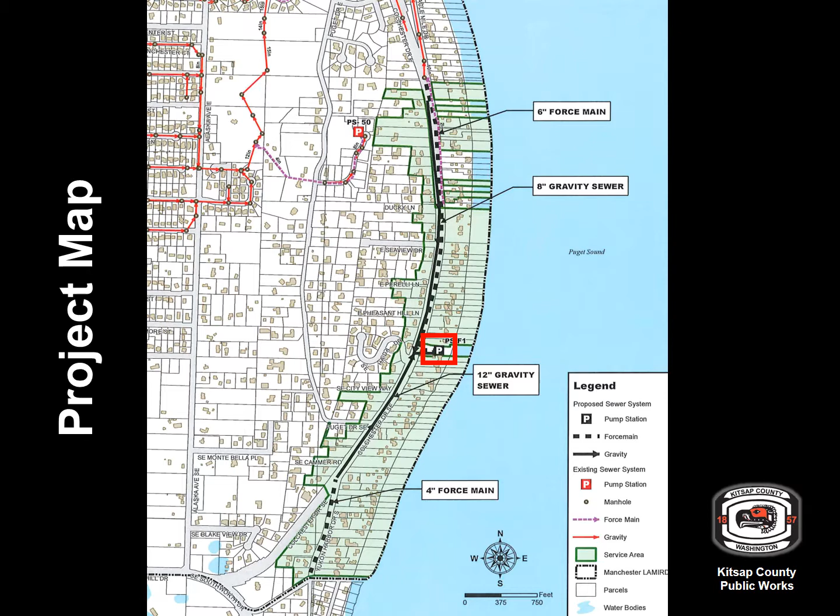Project components include a pressurized force main, gravity pipe, and a pump station placed on county property, outlined in red. Side sewers to connect to homes, and individual grinder pumps for homes on the shoreline that require sewage pumped up into the system. Construction on this project is slated to begin in spring of 2017.

There are key points for property owners to consider when deciding if they want to connect to sewer services once the project is completed. The county has been awarded funding by the Department of Ecology in the form of a loan of $432,000 that can be used for design and permitting for the project. The loan is funded at 2.4% interest and repaid over 20 years, and a $4.56 million centennial grant that can only be used for construction costs.

A utility local improvement district, or ULID as they are known, is a financial tool available for property owners within the proposed project limits. The ULID allows property owners to spread their costs over a 20-year period. Property owners that participate in the ULID also have access to any excess grant funds, which then can be used to offset individual property costs.

Property owners need to decide if they're going to connect to sewer service once it becomes available. If you do not connect, you will not incur any costs. In the rest of this presentation, we'll explain the costs associated with connecting to the sewer system and also the options of self-financing these costs or connecting via the ULID.

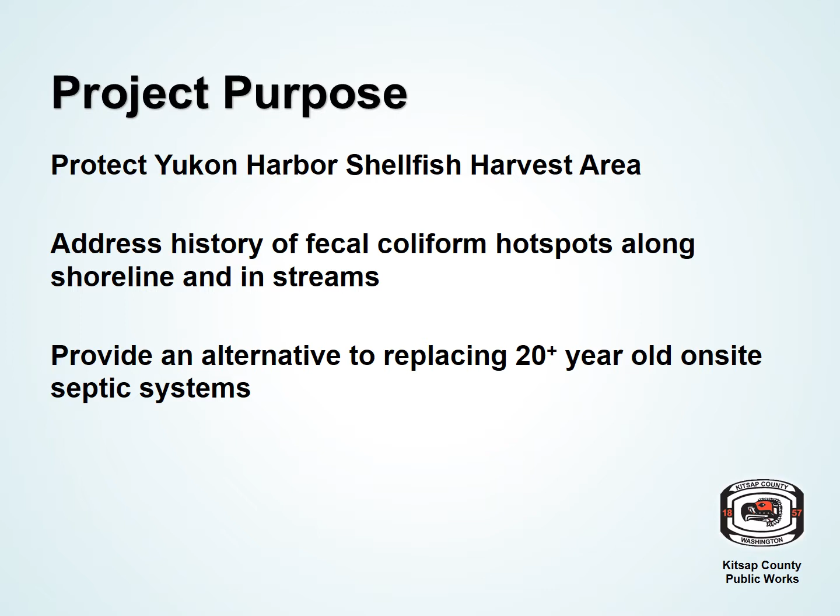The purpose of this project is to help protect the Yukon Harbor Shellfish area. This project addresses a history of fecal coliform hotspots along the shoreline and in streams by providing an alternative to replacing on-site septic systems, some of which are 20 years or older. The county received grant funding from the Department of Ecology to improve these environmental issues.

The total property owner cost to connect to sewer includes three elements: common infrastructure costs, individual property costs, and a newcomer's fee. The common infrastructure costs consist of the pump station and sewer pipes in the street. The cost for property owners, which includes a portion of the design and permit costs, is $8,500 per parcel if the property owner decides to connect.

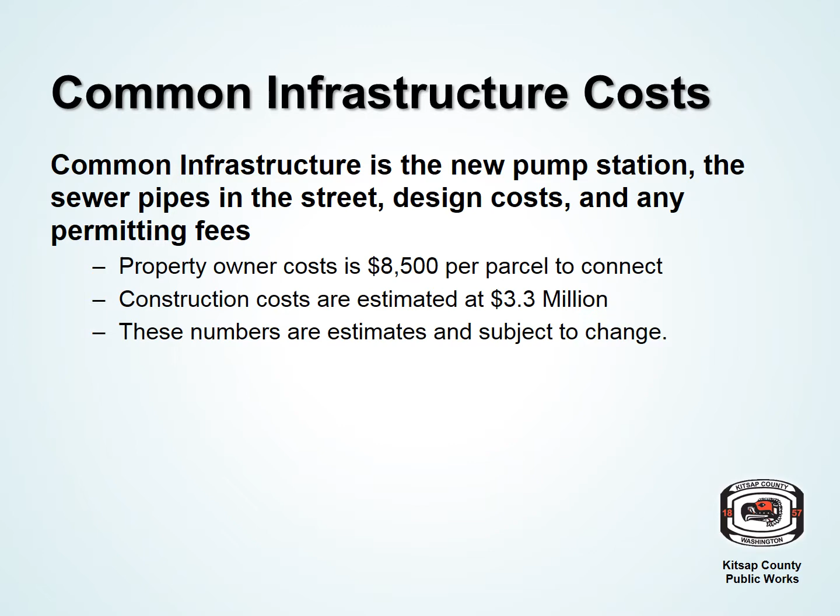Current estimated costs of construction are $3.3 million. Grant funding from the Department of Ecology for $4.56 million may be used for construction only. If grant funds remain once construction is completed, those funds can be used to offset costs to property owners. These numbers are estimates and may increase or decrease.

The other costs to property owners include the individual property connection costs and a newcomer fee. The individual property connection costs are the costs of construction on your property. This is different than the cost to build the common infrastructure. These are the costs that connect your home to the common infrastructure.

Of the 121 lots within the project area, 79 are below the sewer and will require individual grinder pumps. The cost to connect for these lots, including one of the pumps, is estimated at $23,000. For the remaining lots that do not require a pump, the cost to connect is estimated at $9,500. The individual property connection fee includes the cost to decommission existing on-site septic systems and restore landscaping.

Those who choose to connect to the system will also be required to pay a $4,700 newcomer fee. This is due as a lump sum and is paid by the property owner. If property owners connect within the ULID, these costs, with the exception of the newcomer fee, could be offset by remaining grant funds.

We talked about the estimated $8,500 per parcel common infrastructure cost for those who choose to connect. There are a few ways to pay these infrastructure costs. If a property owner is part of a ULID and decides to connect to the sewer system, the home is connected as part of the Public Works project. Property owners then have the option to pay their portion of common infrastructure costs over a 20-year period. Any ecology grant funds remaining after construction may be divided between property owners in the ULID to help offset costs.

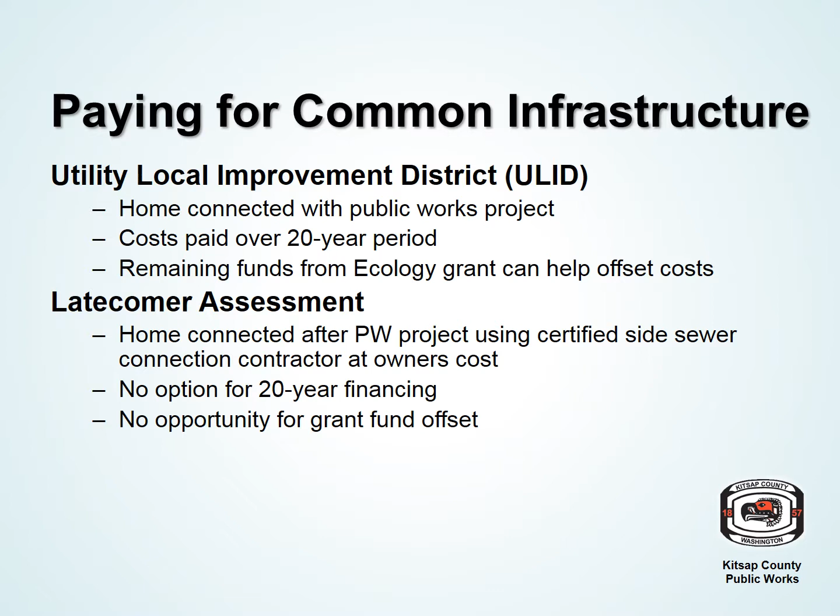If a property owner does not connect as part of the ULID, there is the option of connecting after the project is complete. This is called a latecomer assessment. In this case, the property owner pays a certified side sewer contractor to connect the home to the sewer system. Latecomers do not have the 20-year financing option included in the ULID. Latecomers do not share in offsetting costs with ecology grant funds remaining after construction. If a property owner decides not to connect to the sewer system, they incur no costs.

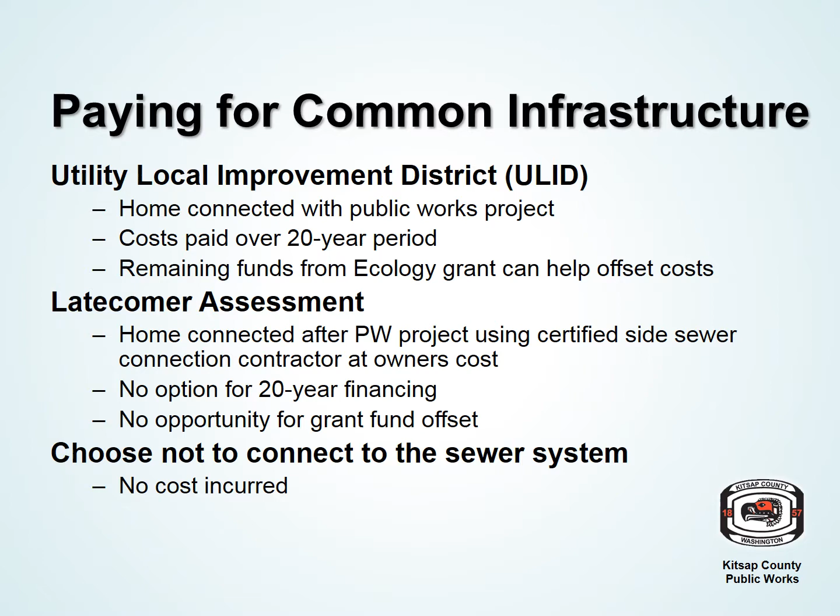The same options are available for paying individual property connection costs. If a property owner participates in the ULID, the county contracts the connection work on the owner's behalf. This requires a temporary construction easement on the property to grant access to the county's contractor. The cost of this connection, estimated at $9,500 for direct connections and $23,000 for properties that need a grinder pump, is added to the ULID assessment. The newcomer fee of $4,700 must be paid as a lump sum and cannot be rolled into the assessment. If there are grant funds remaining after construction, property owners may reduce these costs with the remaining grant funds.

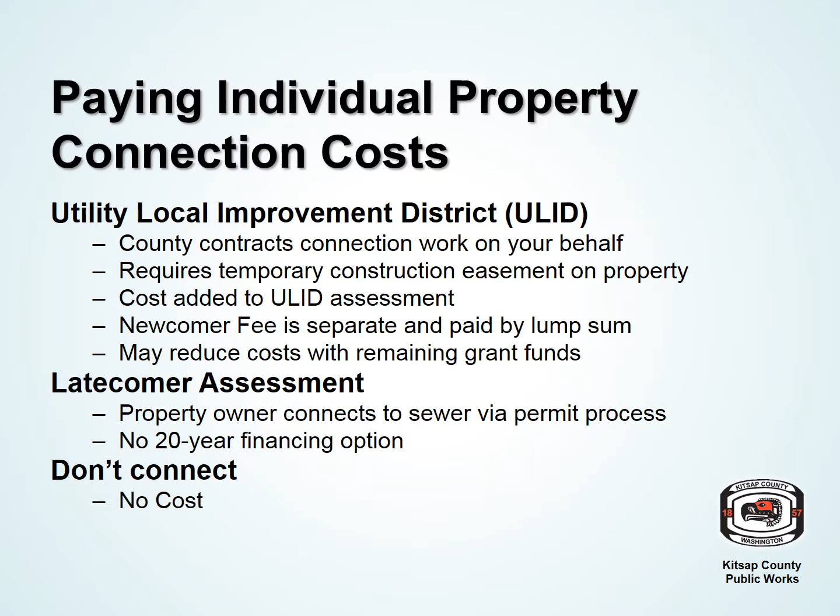A latecomer assessment allows property owners to connect to the sewer via the permit process after the construction is complete. The property owner would incur all individual property costs and cannot take advantage of the 20-year financing offered by the ULID. And just like with the common infrastructure costs, if the homeowner decides not to connect to the sewer system, their cost is zero.

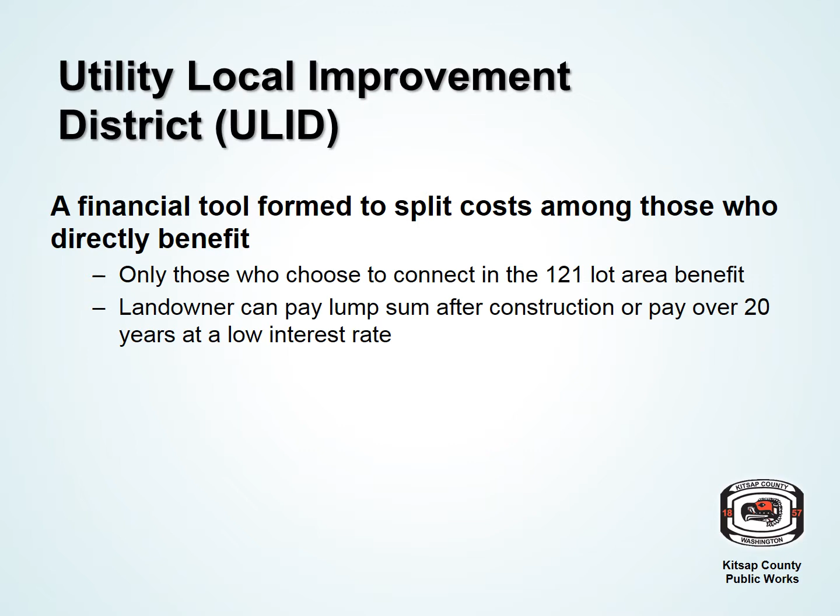A utility local improvement district is a financial tool that's formed to split costs among those who benefit. Only those who choose to connect within the 121 lot area benefit through the ULID. Within the ULID, the property owner can pay sewer connection costs by lump sum after construction is complete, or they can finance these costs over 20 years at a low interest rate. The ULID is formed by resolution from the Kitsap Board of County Commissioners. If 40% of the property by area objects in writing, the ULID is stopped.

Property owners will receive a form from the county. They need to sign this form if they want to connect to the sewer via the ULID process. The county will send these forms out to property owners and will be asking property owners to complete these forms and return them back to us by the end of April. A public hearing and the resolution action occurs at one of June's Kitsap Board of County Commissioners' regular meetings.

The cost of the sewer connection differs depending on your lot location. For those that connect with a gravity pipe, the cost is $9,500. For properties that require a grinder pump, the cost is estimated to be $23,000. We will be contacting property owners that need grinder pumps and providing additional information about the pumps. We also will host informational meetings to explain grinder pumps and how they're used in this project. If you decide to connect to the sewer system after construction is completed, you will pay the prevailing market price to a certified contractor to connect to the sewer. If you decide not to connect to the system, you incur no costs.

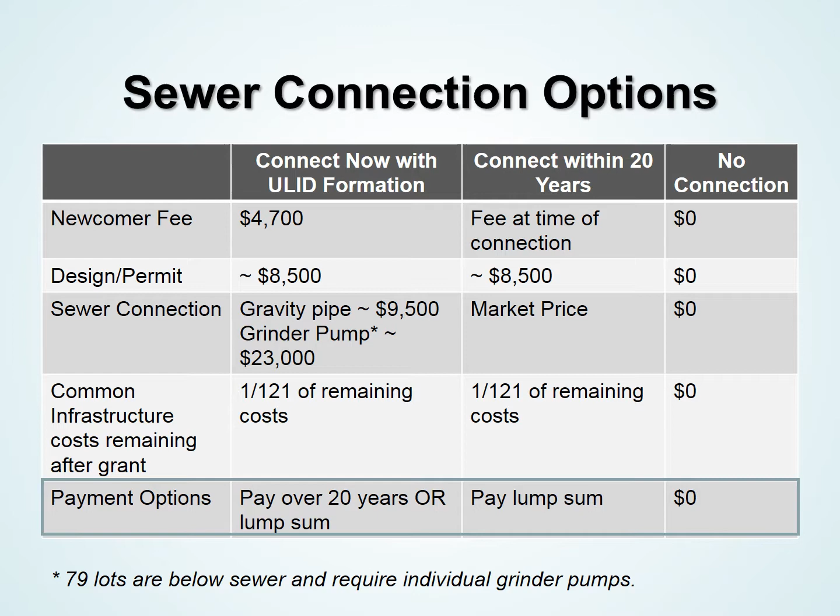As we have said, there are two ways to pay these common infrastructure costs. Property owners connecting within the ULID are able to finance costs over 20 years or pay a lump sum. Remember, this does not include the newcomer fee, which is always paid as a lump sum. If a property owner is not part of the ULID and decides to connect within 20 years, all costs must be paid as a lump sum to the county. And, as always, if a property owner decides not to connect, they incur no costs.

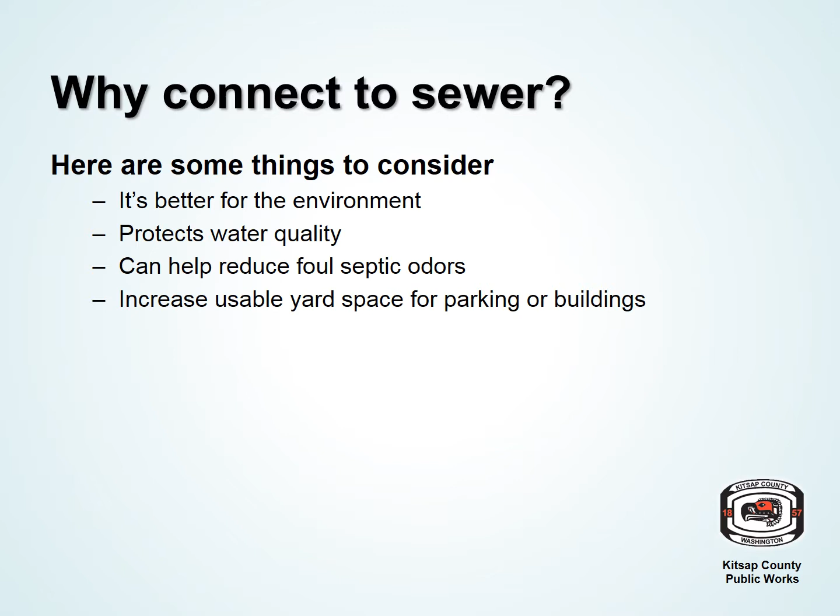So why should you connect to a sewer system? Well, sewers can be better for the environment and they help protect water quality. That's why we're able to receive a grant from the Department of Ecology for this project. Connecting to sewer helps reduce the foul odors associated with septic systems. And when you connect to a sewer system, you increase your usable yard space.

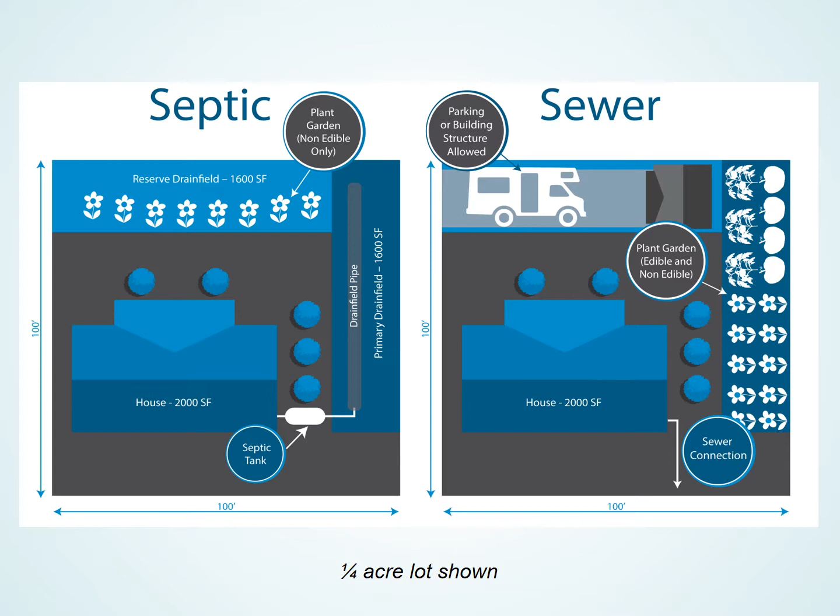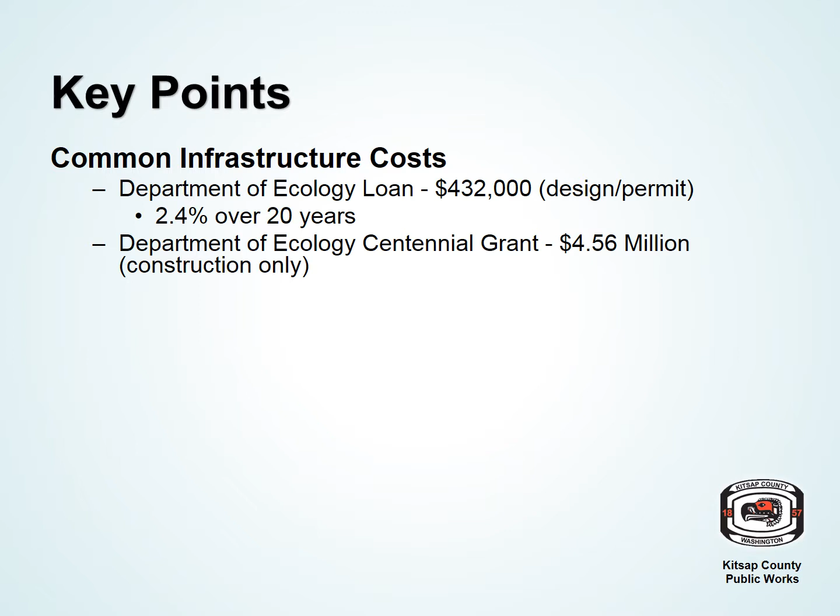Here's a recap of the key points in this presentation. We talked about common infrastructure costs and funding available for these costs. We have obtained a low-interest Department of Ecology loan of $432,000. We've also received a Department of Ecology Centennial grant for $4.56 million, which can only be used for construction.

We talked about forming a ULID by resolution through the Board of County Commissioners. This financial tool allows some costs to be paid in a lump sum or financed over the 20-year period. The ULID also allows any excess grant funds after construction to be distributed to help offset individual property owner costs.

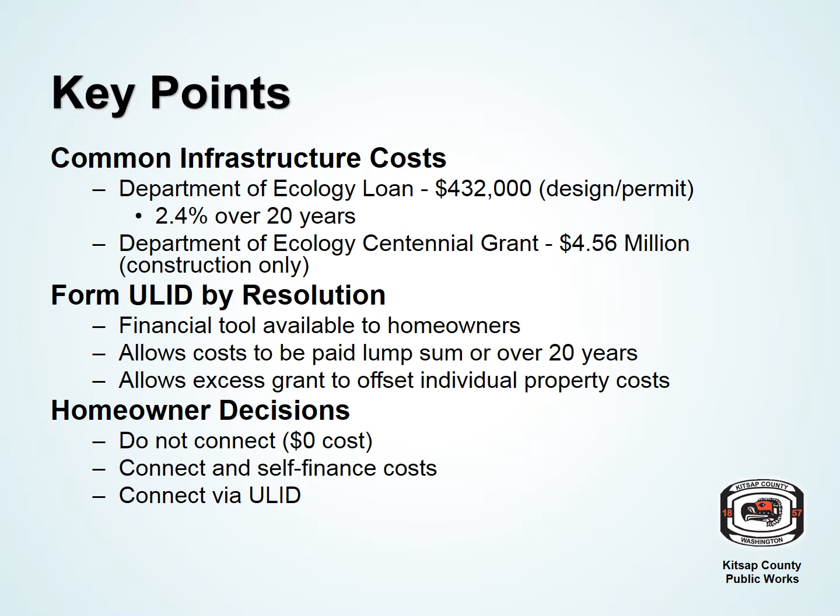And we talked about the decision that each property owner in the improvement area must make as part of this project. If the owner decides not to connect to the sewer, they incur no costs. A property owner may decide to connect and self-finance the cost, or the property owner may decide to connect via the ULID and take advantage of the opportunity to spread the majority of connection costs over a 20-year period.

Over the next several months, there are important steps in bringing this project together. After we contact all property owners within the 121 lot project area, we'll focus on the 79 lots that require individual grinder pumps. We'll provide detailed information and conduct informational meetings to help these property owners better understand the project.

You will soon receive a form asking you to make a decision on the proposed ULID. You will need to respond to this form by April 30th with your decision. After these forms are collected, the Kitsap Board of County Commissioners will hold a ULID public hearing at one of their regular June meetings, either June 13th or June 27th. If there is no written objection by 40% of the property area, the board will pass a resolution to form the ULID. The next step is designing the project and going through the permitting process.

We'll continue to engage property owners during this time and involve them during the project design. We expect to start construction in spring of 2017. The ecology grant requires the project to be completed by December 31st, 2018. The current goal is to complete the project by the end of 2018.

When construction is complete, a final ULID assessment that reflects the actual costs and any available excess funding is distributed. If a homeowner decides to connect to sewer after the construction project and ULID assessment, they will pay the different costs based on a latecomer assessment.